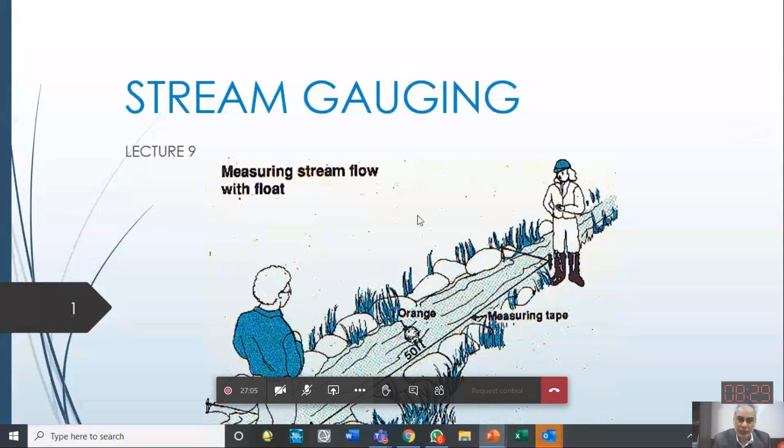So in this figure, in the title figure, you are seeing a very simple method of measuring, which can be used by you also. And who can describe this figure, what they are doing? क्या किया हुआ है? एक stream चल रही है. There is a stream. And there is an orange floating in the stream.

So in this case, we can use a staff, meter, or any stick which we can measure with. We can put that stick inside the water and see how much is the depth at one location. Then we put it at another place, and see how much is the depth along the cross section. Along the cross section, we put the stick or staff inside and check the depth at the next point, then the next, then the next.

In this way we can draw the cross section. This method, in which we physically go into the stream and measure the bed elevation or depth of water, we call the sounding method. We are sounding the bed of the stream using bamboo. If it is a 4 or 5 meter deep stream, we can use large bamboos.

We can sit in a boat and do it. And if it is a stream with small depth, we can go into the stream ourselves. That's why they have long waders worn, and they can go into the stream. This we call wading. This method of sounding the stream by going into it and measuring the depth of water, we call the wading method.

So keep in mind, the cross section you have to survey. And if it is a very deep channel, for example, even a large bamboo tree cannot reach the bed of the channel. Is there any example of such a channel which is very deep?

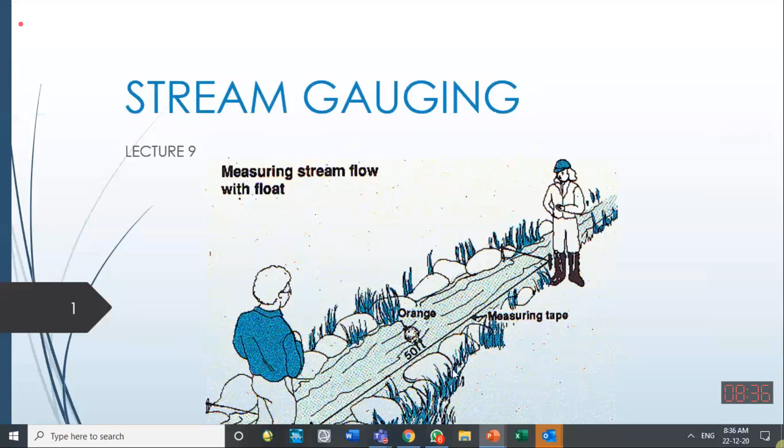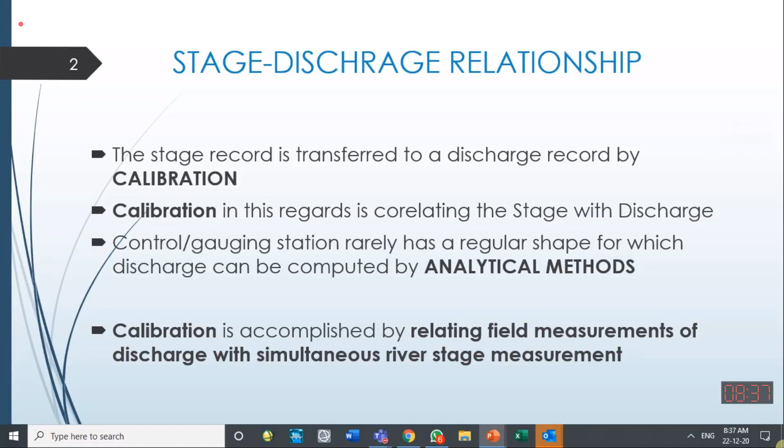As I have already described, usually we have a stage-discharge relationship, which is called a rating curve. Development of this stage-discharge relationship we can call calibration, or making the relationship between these two parameters. Later on we can use these rating curves for reporting the discharge by simply measuring the stage at the location. First we should have the rating curve with us, and then we can use that in the later stages, later time steps.

Before that, they have mentioned that the rating curve is used to estimate the discharge. And I have informed you that the rating curve is the relationship between stage and discharge itself. Usually stage is on the vertical axis because it is mentioning the depth, and the discharge is usually on the x-axis.

This is our norm over here. Although discharge is dependent upon the depth, so independent parameters should have been on the horizontal axis, but because we can see the depth variation vertically, it is normal practice that depth is mentioned on the vertical axis in the rating curve. So if the rating curve is available at a location, you can estimate the discharge using that rating curve by knowing the stage for any water level.

Another method is current meter. Current meter is a mechanical, rotating kind of instrument. When it is placed at a certain depth in the channel, it starts rotating with the speed of the water, causing revolutions or rotations of its cups or propeller, and the number of rotations per second can be related to the velocity.

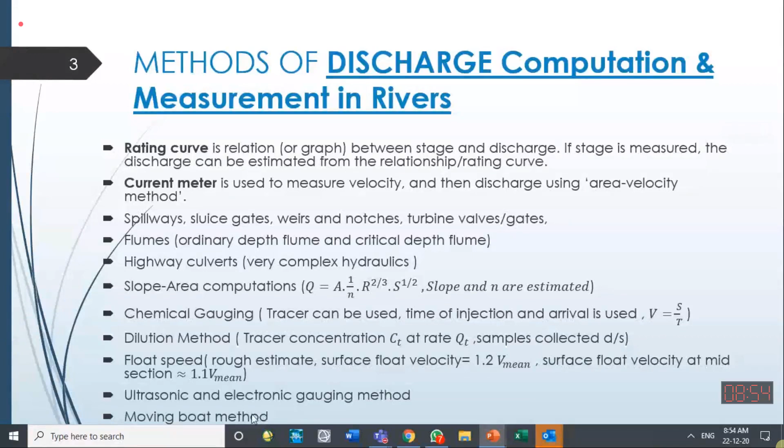Ultrasonic and electronic gaugings are quite frequently used nowadays - these are new methods. Sound waves or electromagnetic waves are used to estimate the depth of the channel and the velocity in the channel. In the moving boat method, these instruments can be placed on a boat, so this method is called the moving boat method.

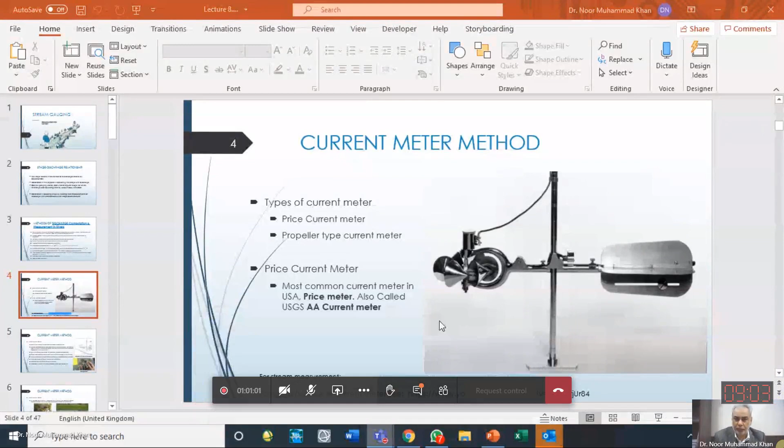The current meter is the most widely used method for estimation of velocity in the stream. Current meters can be of different kinds. Some current meters are provided with cups attached to a vertical axis - the axis of rotation is vertical, and they rotate in a horizontal plane. So if the axis is vertical, the cups will rotate in a horizontal plane.

Usually we have a weight installed to this current meter at the bottom, not shown in this slide, but it will be shown over here. In this slide, there is a fish weight, we call it. Its shape is like a fish. It keeps this whole instrument vertical. This weight is quite heavy, 30-pound weight, 40-pound weight, depending how big is the stream, how big is the flow velocity. This weight does change.

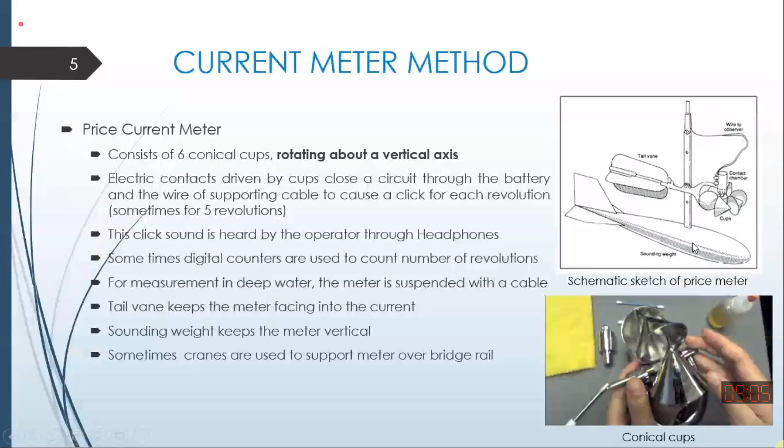So one will be the cup type of instrument, and the rotation of the cups. For each rotation, there will be a click generated, and those clicks will be noted with the help of some data logger or screen, or in the old instrument, usually we were provided with the

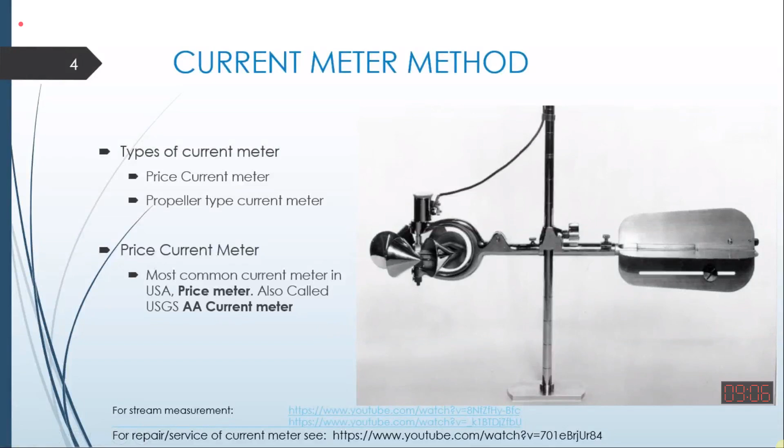Another kind of current meter is the propeller. In the Price or AA current meter, we use cups. In the propeller type, we have something like a propeller of a turbine or of a boat attached to it. Its shape will look like this one. So this is a propeller current meter. It rotates on a horizontal axis.

Its axis of rotation is horizontal, and it doesn't have cups installed. Rather, curved vanes are installed as a propeller. So when water passes along this, it starts rotating, and the rest of the method is the same. The number of ticks is measured, and we can estimate the velocity. So these are the two main kinds: one is a cup type current meter, another one is a propeller current meter.

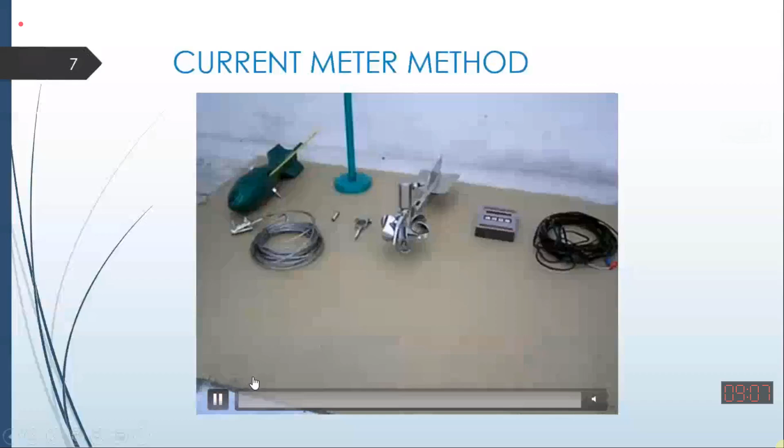So there are some videos available which you can see later on. So this is how its installation is carried out. You can see this video in the later part. And this is available in your slides also. Here is the actual measurement.

When water depth is small, you can go into the stream and measure the depth of the channel at different locations using this rod, and we call this a wading rod. This method of measurement of discharge or velocity we call wading. Wading, W-A-D-E, means walking through the channel. So they physically walk through the channel at different locations.

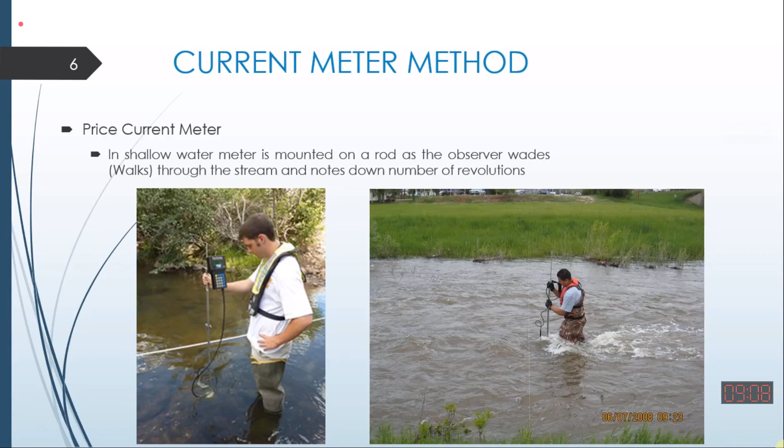They measure the depth, they measure the velocity, note it, then come to the office and carry out computation, and the total discharge in the channel is measured. Because velocity is different at different locations in the channel, they don't take only one reading. So it is recommended that the whole channel be divided into smaller segments like this one. They divide it into 10 to 20 smaller segments.

So velocity is measured in each of these segments independently, separately. They will go to the first segment, measure the total depth, then the current meter will be placed at the appropriate depth, because the velocity varies vertically. So the current meter should be placed at the appropriate depth.

It is found that the appropriate depth to estimate the velocity in a certain section should be 0.6 times of the total depth from the top of the water surface. That will be representing the mean velocity in that part. So we say this is the mean velocity at 60% of the total depth. So one method is that we place the current meter at 0.6 times of the total depth in the channel, and this method of measurement is called the 6/10 depth method.

So when the channel is not very deep, it has a shallow depth, then only 1 point can be used to estimate the velocity, and that 1 point should not be the middle of the channel. It should be a little bit lower than the middle, 0.6 times of the total depth at that place from the top of the surface. For example, at that place, channel depth is 1 meter. So mean velocity will be at 0.6 meter from the top of the surface, not from the bed.

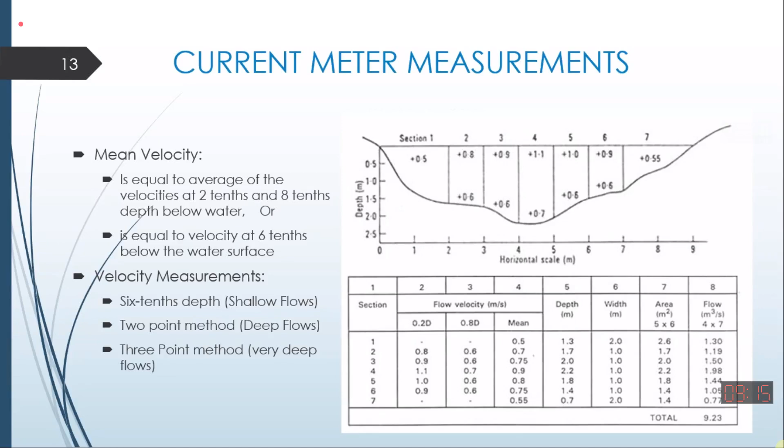So knowing the water stage of the channel at that time, that will give you one point between stage and discharge on the rating curve. So repeating it over several days, several months, you can develop the rating curve at a new location. If somebody has already developed it, then you are lucky. That's important, and there is a lot of labor behind it.

This is showing you the variation of the velocity at different depths and different width points. So it should be kept in mind that velocity is not constant. That is why we divide the channel section into smaller subsections. This is showing you the velocity distribution in the vertical plane. If you go along the depth, velocity in some places is small, then large. So velocity varies with respect to depth. This should be known to us.

This should be known to you, that velocity in an open channel is not constant at each location. It varies. So what is the mean velocity? People have estimated that the mean velocity at a certain width of the channel section is at 0.6 times the depth, or the mean of the velocities at 0.2 and 0.8 times the depth. So that should be known to us.

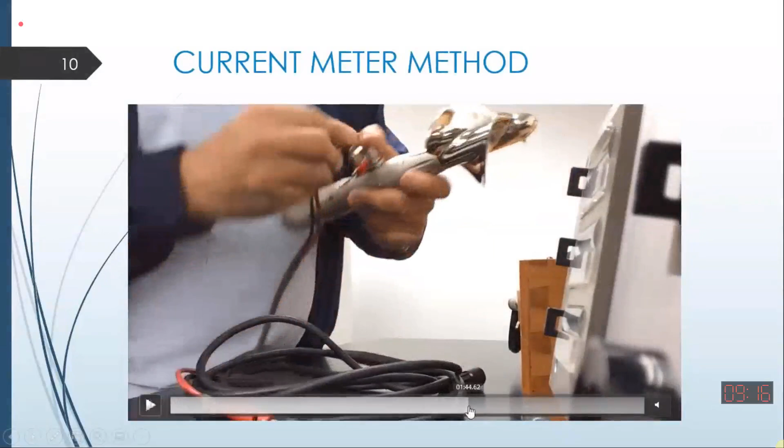He is checking it, opening it, checking it, and each rotation will give a pulse, and that pulse or signal is noted by this meter or counter. Instead of this counter, we can have a headphone installed and we can listen to the sound also.

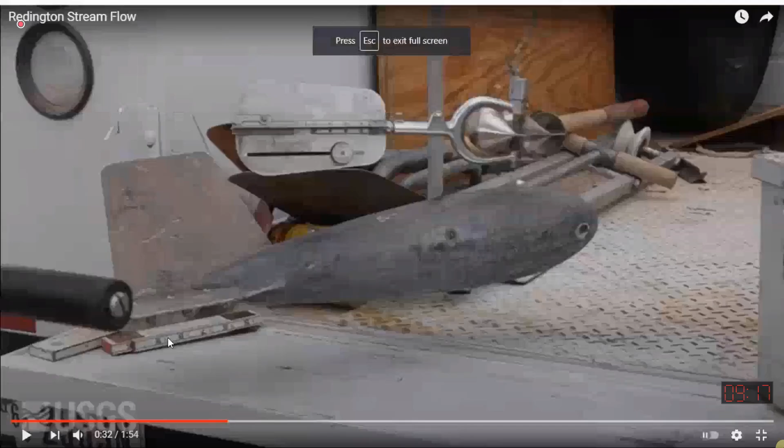Similarly, on this first slide, these two YouTube videos are there. They are actual measurements of discharge in a channel in the USA. If I show you just for a few minutes, here is a current meter in the laboratory, and they are using it, and the weight they are using is 100 pounds. And this is a trolley we sometimes use when we are working on a bridge. We need such a trolley.

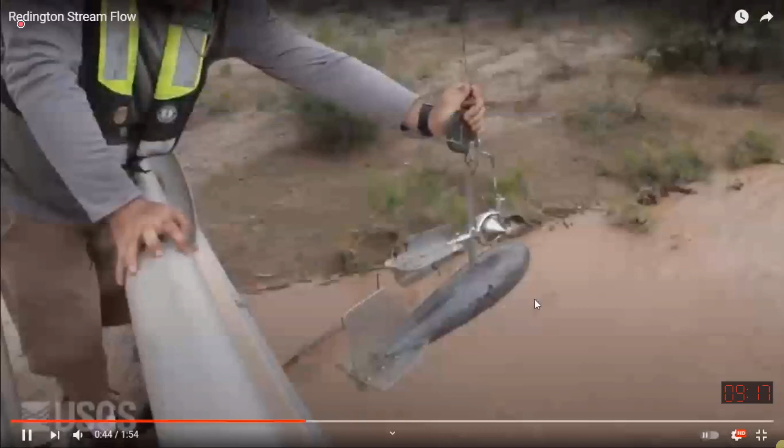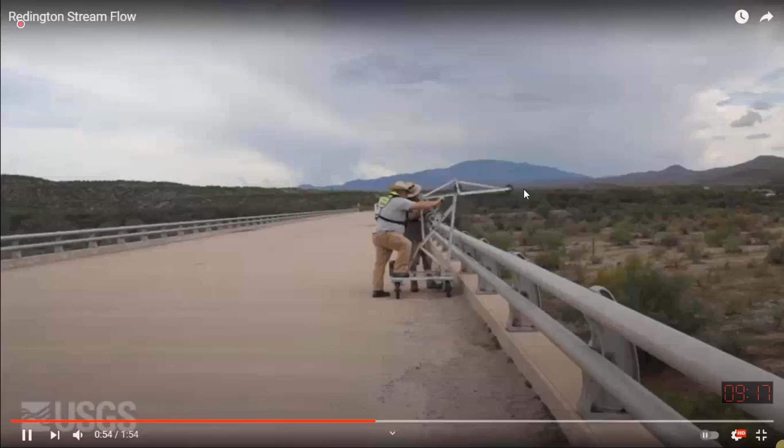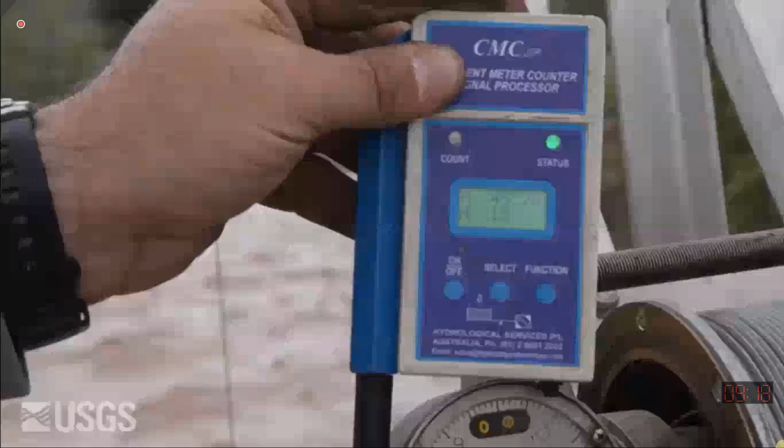A suspended current meter using the bridge crane or bridge trolley. They release it, and it goes into the channel itself. Here is a wire which is used to measure the stage. Now we cannot see the current meter, but because of the weight attached to it, it stays vertical.

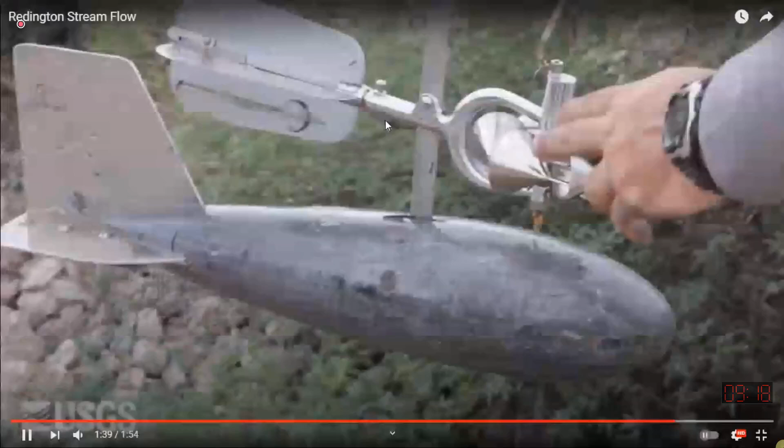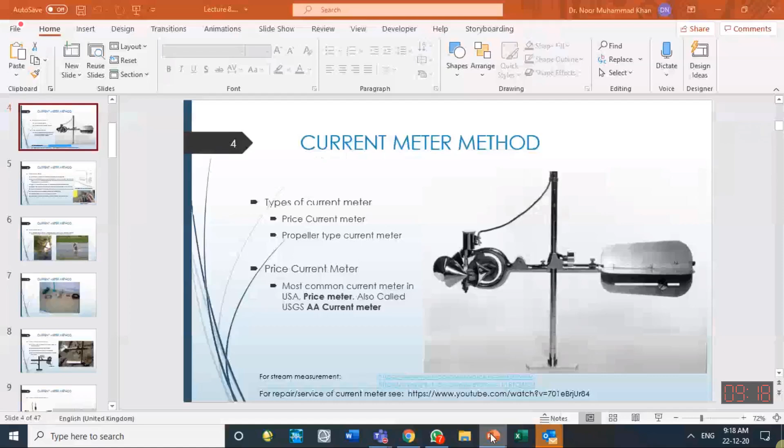So these are the current meters. Here is a rating table, the rating coefficients for this instrument. This instrument is available in our lab also, so I have taken this picture from the lab. They are telling that if the 40-revolution contact is being used, then use these coefficients, 38.5 and 0.0262.

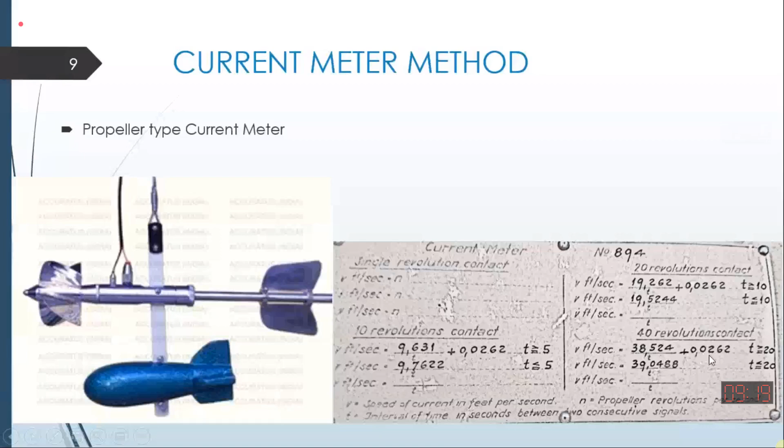And I have elaborated that the total discharge is estimated by measuring the discharge in the smaller subsections and then summing them together. Usually we divide it into 20 to 30 vertical sections. The criterion is that no subsection should have flow or discharge of more than 10%. If that is the criterion, it means we have to make at least 10 sections.

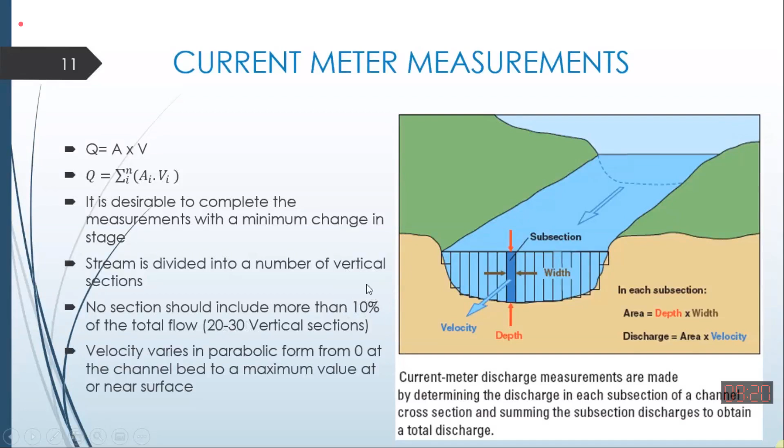But if you divide it into 10 parts, flow is usually much higher in the middle parts. So it is possible that in the middle part the flow is more than 10%. That's why 20 to 30 vertical sections should be made if we want to make sure that no subsection has flow of more than 10%. Got it?

So A and B will be given by the equipment manufacturer, the current meter manufacturer, or you will get it from the calibration of that current meter in the lab, in the flume. So either 0.2 times and 0.8 times of the depth are used to estimate the discharge, or 0.6 times of the depth. It should be kept vertical with the help of this weight.

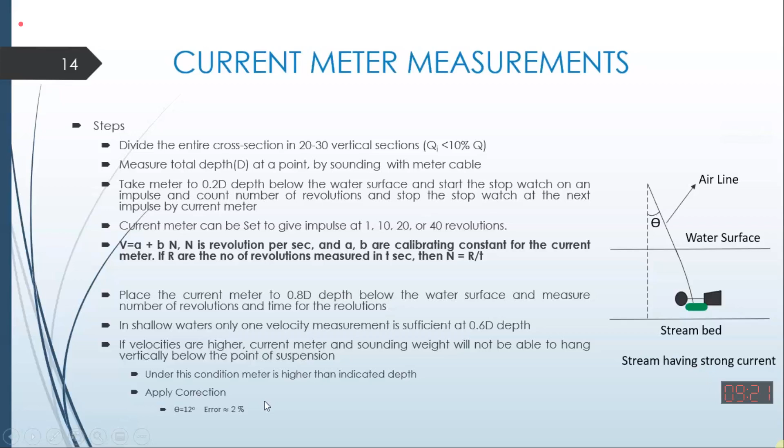If it is not vertical, then there are chances that error will occur, and the approximate error for 12 degrees out of plumb angle will be about 2% of the velocity. That will be wrong. So if you are using the 2 points method, take the average. If you are using the 1 point method, that will be the mean velocity.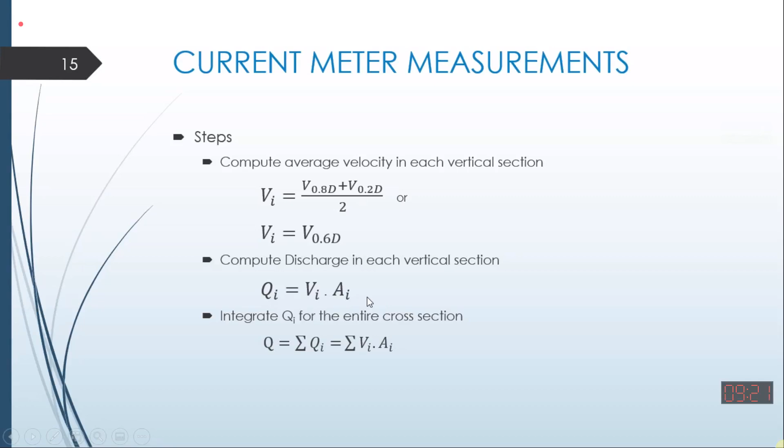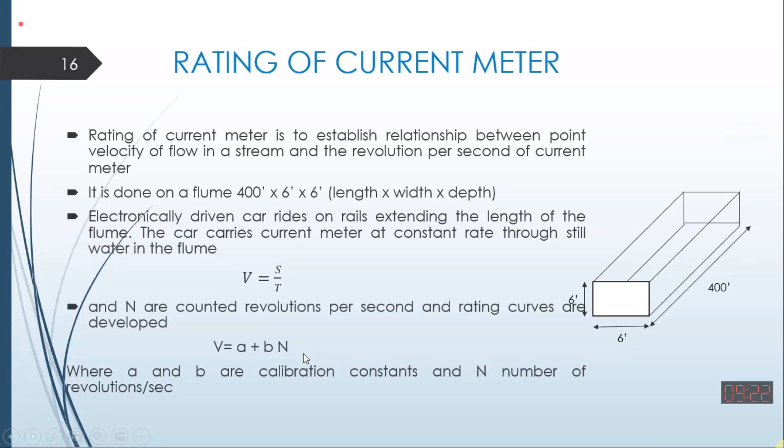Mean velocity into flow area of that subsection will give discharge in that subsection. Summation of all such discharges will give total discharge in the channel. If you divide this total discharge of the channel by the flow area, you will be getting the mean velocity. So it's a numerical question. These you have to solve yourself.

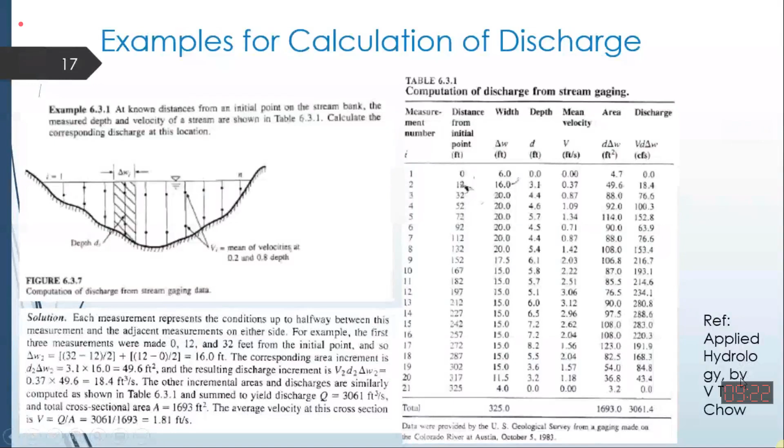Please go through this example, and a few lines have been solved and described over here. And I have taken this example from Applied Hydrology by Ven Te Chow. If this book is with you, you can see this example over there also. This example is solved in this part also, so I describe it over here.

Discharge is measured in a channel and it is divided into a number of subsections. The first reading is taken at a distance 0 from the bank, and depth over there was 0, meter was at the 0 depth, no revolutions were there. And then the second measurement was done at 2 feet from the bank, and the depth over there was 1 feet. Meter depth was 0.6 of this one. So 0.6 feet, so the 1 point method is used.

Number of revolutions were 10 revolutions in a time of 50 seconds. So 10 revolutions in 50 seconds, we have to convert it into number of revolutions per second. A for this current meter was 0.1, the coefficient 0.1. The second coefficient, multiplying coefficient, was 2.2. So such a table should be made before going to the field.

Such a table should be made: distance from the bank, depth at that place, and location of the current meter with respect to depth, whether it is 1 point or 2 points. So revolutions noted at that location and the time in which those revolutions have been noted. Then N should be calculated, number of revolutions per second, division of these two.

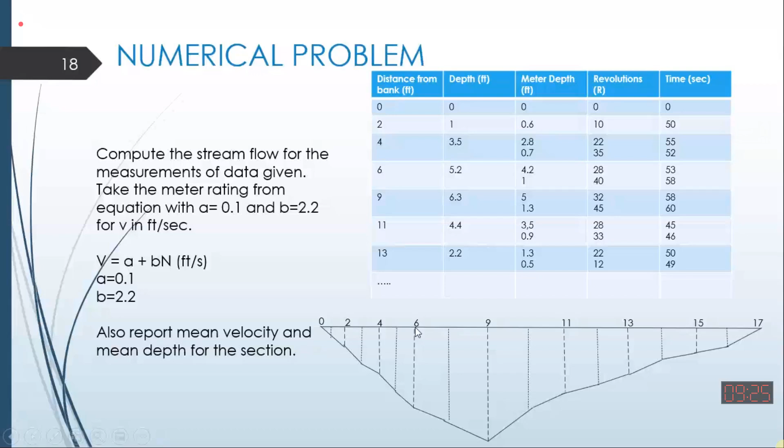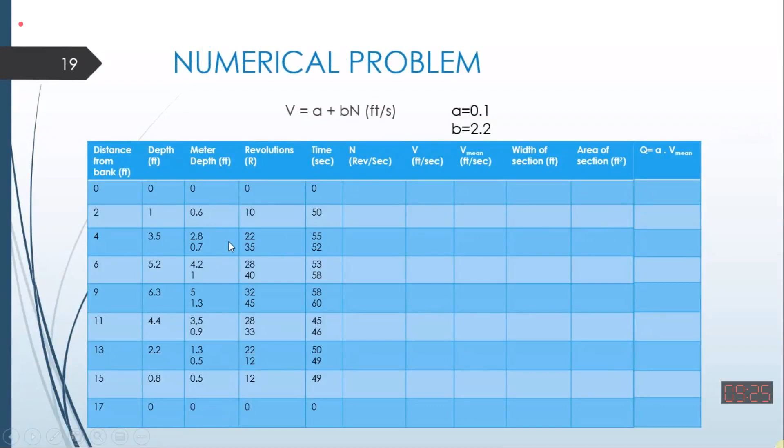So width of this section will be 2 feet. Depth is noted over there. So width for the second should be 2 feet. Depth should be whatever depth is measured over here, 1 feet. So area is 2 into 1. We can estimate. So this is solved over here.

So please try to do it yourself. Usually we put some similar questions in the exam also. If you don't have practice, you will not be able to do it. Sometimes we give you the mean velocity ourselves. Sometimes we give you the N value, and A and B values will be given. Then the mean velocity you have to estimate.

Sometimes we put the current meter at one depth only, 0.6 of the depth. Sometimes we put it at 2 depths. So the mean you have to find. So you should know how to calculate the width and the flow area and multiply it with the mean velocity, to get the total discharge in a subsection. Add them together, you get the total discharge. Divided by the total flow area, you get the mean velocity also, if you are interested in it.

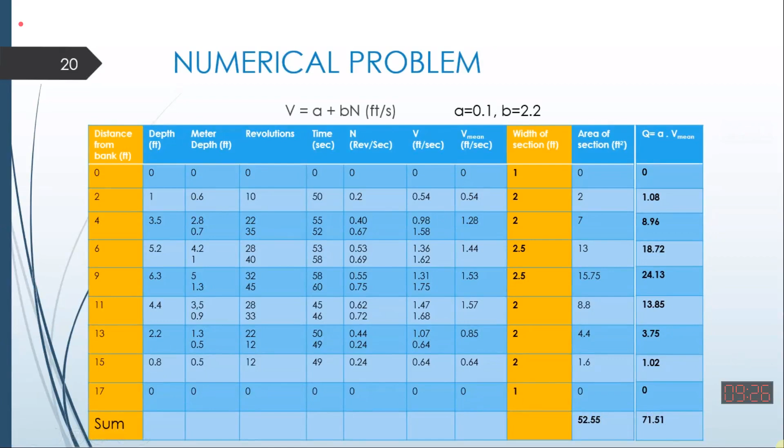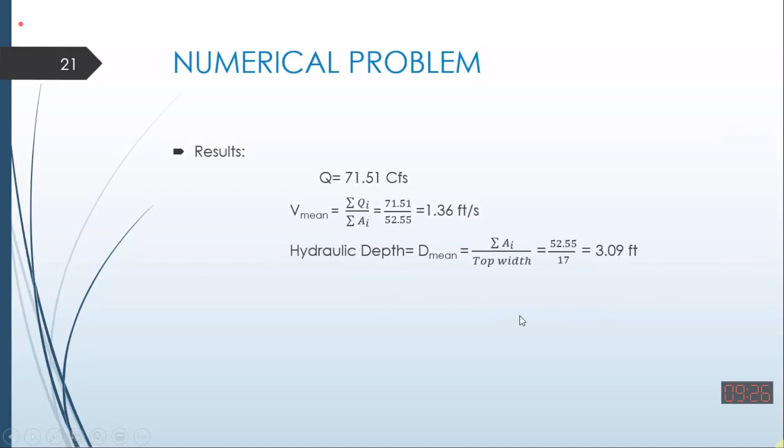So velocity at different sections is different, but the mean velocity will be something else. So please solve it. And also you can have the estimate of the mean hydraulic depth, which is the flow area divided by top width. So many parameters can be calculated using this. So that is the conclusion of the current meter method and its computation. Please solve the numericals so that you are familiar with such computation. And this is utilized in the field also.

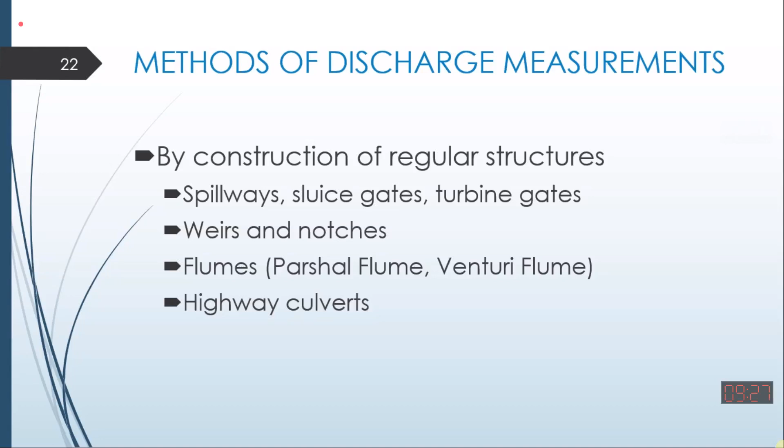Spillways, weirs, flumes, highway culverts can be used to measure the discharge. For all of these, we should have a relationship between discharge and head above the crest of those structures, head above the bottom of those cross sections. So if the spillway is there, head above the crest is related to the discharge, and we can get it. So that is the condition which is shown. There is a notch or weir attached over here. So a V notch is there. The head above this notch is measured, and using the discharge formula, we can have the idea of flow.

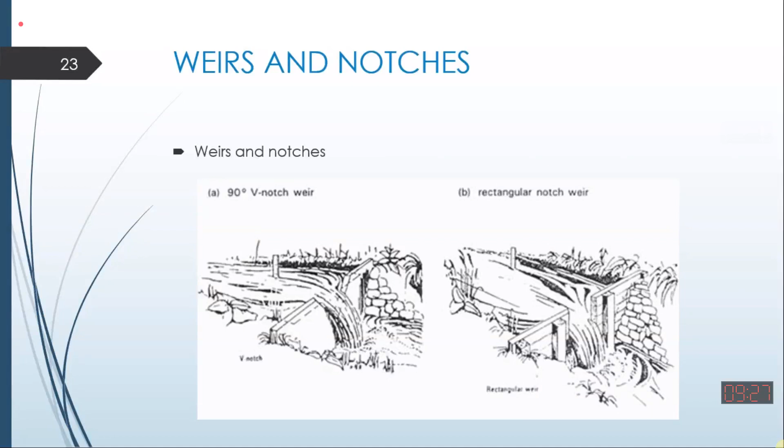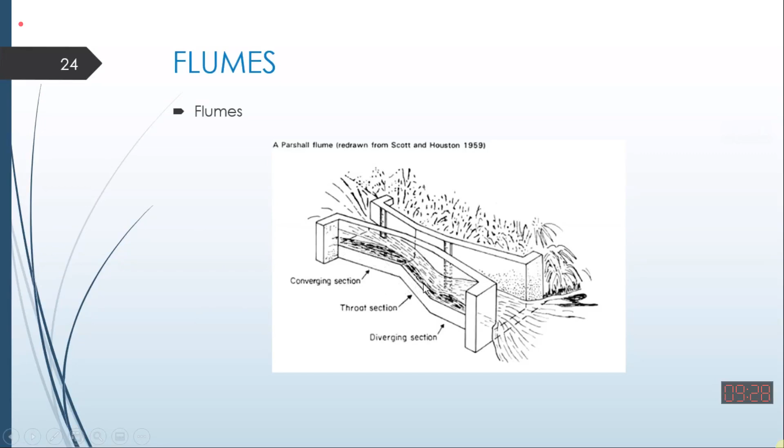So notches are placed in small channels. Weirs are placed in large channels. The difference between weir and notch, I think I told you last time also. Weirs are masonry structures, made of concrete or bricks. Notches are metallic structures made of steel plates. So notches can be rectangular or V notch. Flume I already described. We measure the depth at two sections, one at the throat, one at the upstream side. The difference of these two depths is related to the discharge passing through the flume.

The dilution method may be a little bit new for you. It was developed quite early, in 1863, in the 19th century. It is effective for flashy and turbulent hilly streams where it is difficult to use a current meter. When there is a flashy stream like the Kunhar River, and there is good turbulence of water which mixes the salt, the tracer, inside it quite easily, then we use such a method of dilution of some chemical inside it.

This method involves injection of a chemical or tracer into the flow. We mix some known quantity of some chemical or tracer. It can be a colored tracer. Its known quantity, known concentration, is mixed in the water at one location of the channel, and sufficiently far downstream, where mixing is done, we measure the concentration. So the time taken for a concentration of a certain value to reach the downstream station is related to the discharge with the help of equations in the coming slides. I will show you how to relate the measurement of concentration with the discharge.

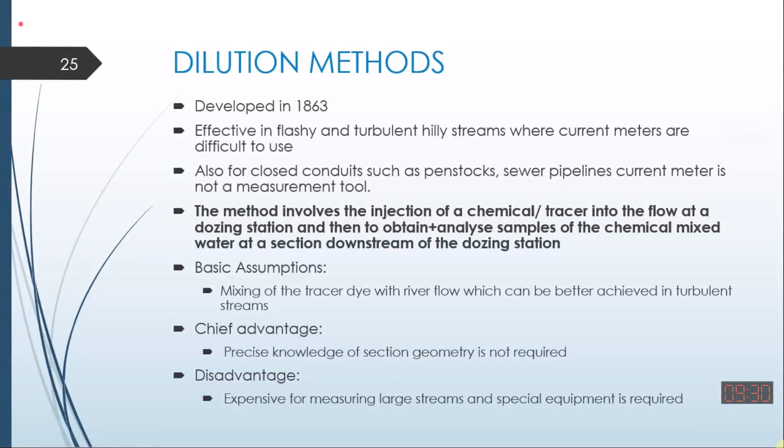So it gives us precise knowledge of the discharge there. Geometry knowledge is not much required here because we are measuring the concentration, and concentration can help us relate it to the discharge. Here is the scheme: if you are using this method, such a scheme you have to develop on the channel.

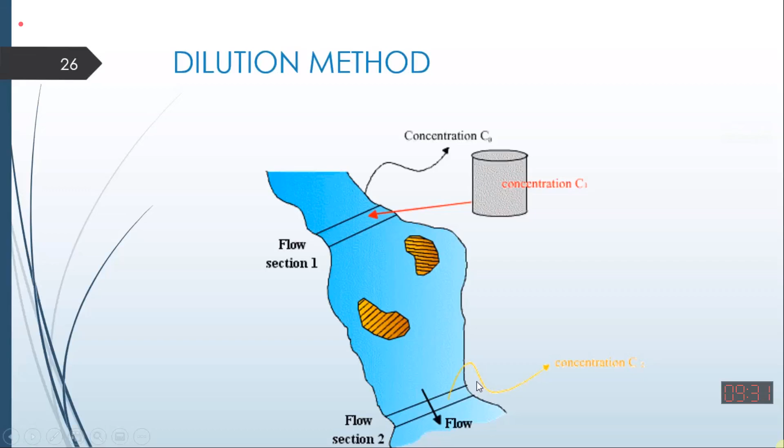You should establish two stations, one upstream and one downstream. At the upstream station, you will be adding a chemical or tracer. At the downstream station, you will be measuring by taking samples and doing lab experiments. Analysis of those samples will be carried out to know the concentration at the downstream station. Here they are mixing a color dye at one location, and at the downstream station, they are measuring it.

The reach should have no loss or gain of flow within the two measuring stations. Between the two stations, there should not be any linkage with another stream. That is an important factor.

Mixing must be complete, so there should be good turbulence in the stream. Wide channels and reaches with bifurcation should be avoided. These are some of the precautions you have to take while using this dilution method.

A reach where turbulence is high should be preferred. Bends, narrows, and waterfalls are good aids for mixing, as they help mix the tracer well. Pools of dead or standing water should be avoided.

The mixture or tracer used can be of different kinds. Sometimes simple salts are used because it is easy to measure the salt and it is not very costly. Different kinds of salts can be used as a tracer. Radioactive tracers can also be used.

There are some materials which radiate energy, such as gamma rays, and these are added to the stream. At the downstream station, using gamma ray cameras or other cameras, their radioactivity is measured, and from this they estimate how much radioactive material has reached there. Its quantity should be used in such a way that it is not hazardous to the habitat and living environment in the water.

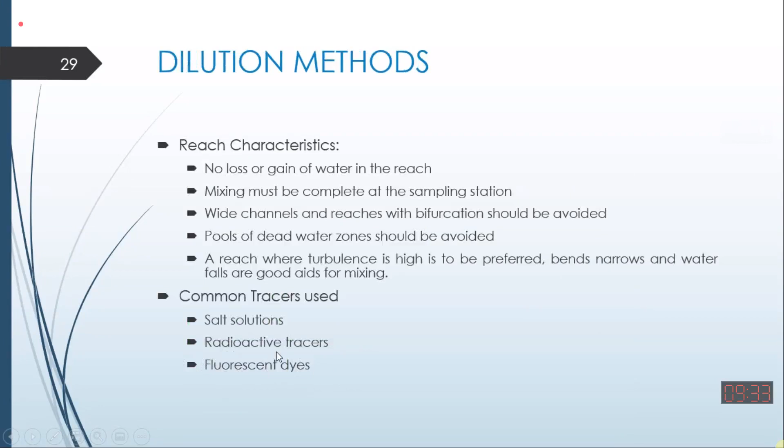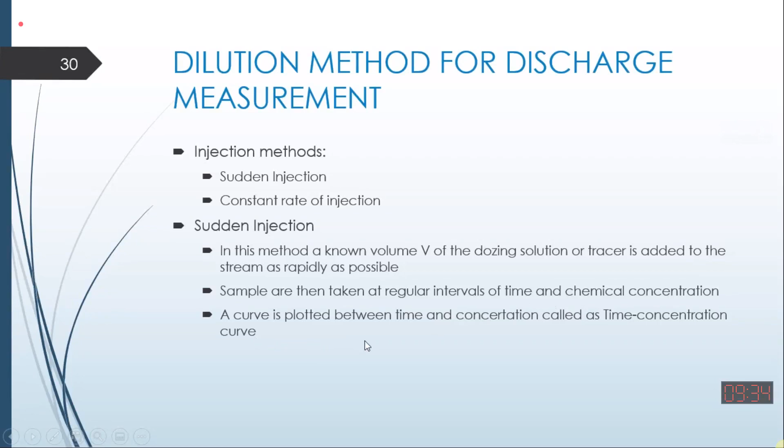In the sudden injection method, a known volume V is added suddenly at one section, and this tracer is added to the stream as rapidly as possible. Then samples are taken for this chemical at the downstream section, and a curve is plotted between the concentration measured at the downstream station and time.

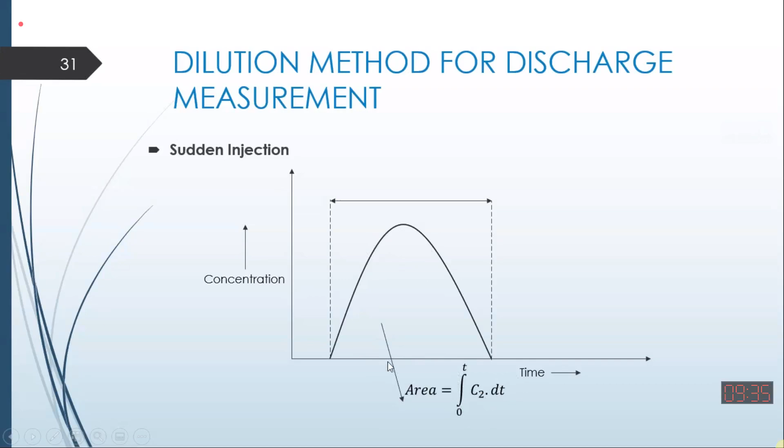The area under the curve gives you concentration multiplied by time, meaning the volume of the salt can be estimated at the downstream station. C2 times dt is the volume of that salt reaching at that point. Between two time steps, if we integrate it, we can find how much salt has reached there.

Here is the derivation of the relationship between the concentration measured at the downstream station, C2, and the concentration added at the upstream station, C0, with the discharge. The assumption here is that whatever concentration C0 is added at the upstream station, minus the initial concentration at that place, multiplied by the volume of the injected dosing solution.

For example, if we add 1 liter of this solution with the salt inside it, that concentration times volume should be equal to discharge times the area under the curve as we noted. This integration of concentration into dt gives the concentration at the downstream station collected over a certain time step dt.

So when we multiply this concentration with the discharge passing over there, that will give me the total volume of the salt passing over there. So if it reaches to the original value again, both left hand side and right hand side should be equal to each other. So volume of the solution added multiplied by its concentration should be equal to Q times dt. This is the volume passing through that location. Q times dt is the water volume passing through that, multiplied by the concentration. So both of these should be equal.

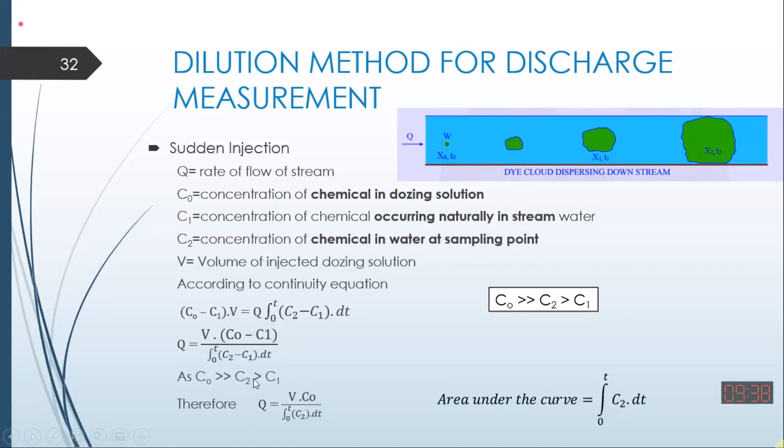So that helps us find the discharge in the channel. Similarly, an equation can be derived if we continuously add a tracer in the channel with a rate of injection of small q. In the previous example, the tracer was added immediately, a certain volume of the tracer V was added immediately.

Now, if we add the tracer through a constant rate of injection of small q, and the concentration in that solution is C naught, and the original concentration in the channel is C1, and the flow passing in this channel is Q, then the sum of these two will be equal to the sum of these two solutions: stream channel flow plus the injection flow, into the concentration measured at the downstream station C2. So this can be related with each other. So discharge Q can be expressed as C naught minus C2, over C2 minus C1, into small q.

So this is a known value. We have added it. C1 is the original concentration in the channel before adding. C2 is the concentration measured at a certain time step after some time. So if the rate of injection is constant, this C2 will also be constant after some time at the downstream location. So that can help us relate the discharge in the channel.

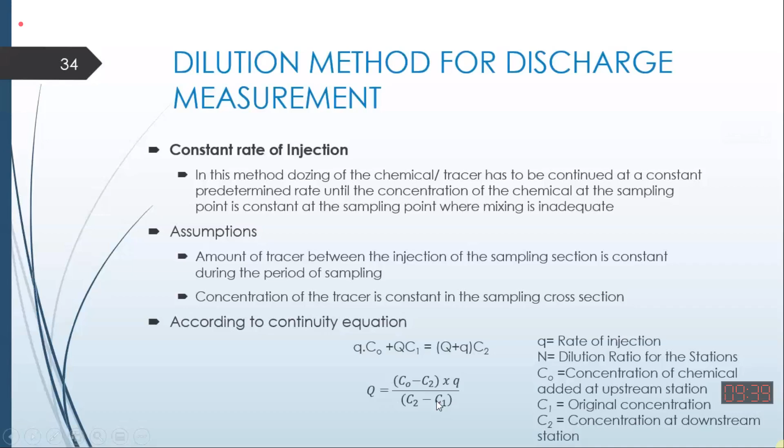Sometimes, again knowing that C naught is much greater than C2, C2 and C1 can be put equal to 0. And this equation can be simplified as Q is equal to C naught times small q, over C2. If we use the solution which we have added with the dilution ratio of N, and have a concentration of C3, then this initial concentration C naught can be replaced with N times C3. So either you use this equation if you have the initial concentration known to you, or you use the rate of dilution and C3, and we can find the discharge in this way using the chemical tracer method.

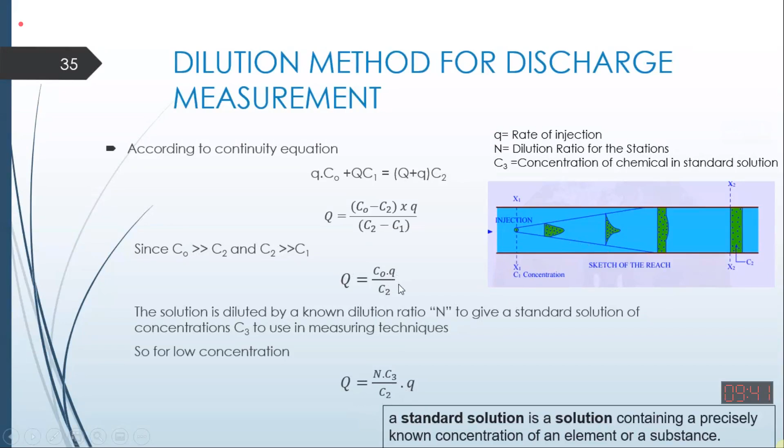So this concentration we measure by chemical analysis of the sample taken from the channel. We add the dose at the upstream station. We measure the concentration, which we call C2, at the downstream station where mixing has already occurred. So C2 and C naught can help us find the relationship between discharge and the initial rate of injection: C naught over C2 is equal to Q. So this can be used frequently for measurement of discharge in the channel.

We call it the tracer method. The ultrasonic method uses sound waves. A pulse is generated, and the time taken by the pulse from one edge of the channel to the other edge of the channel is noted, and that helps us relate the discharge with the time taken by the pulse of the sound wave. It is described in a good way in this video.

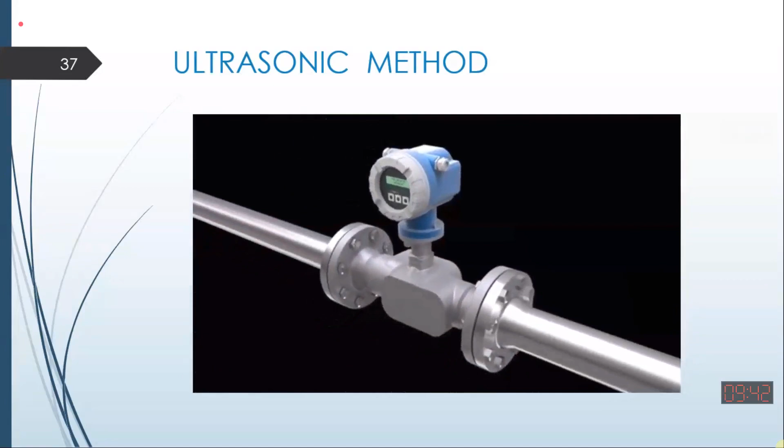These are the sensors attached at the side of the channel. A sound wave is created, and then the sound is...

So when there is no flow, the time taken by the signal going from one side to the other, and then from the other side to the first side, will be the same. But if the flow is occurring, then the travel time will be smaller in the direction of the flow.

Travel time of the sound wave will be smaller in the direction of the flow, and it will be larger in the opposite direction of the flow. So this difference is...

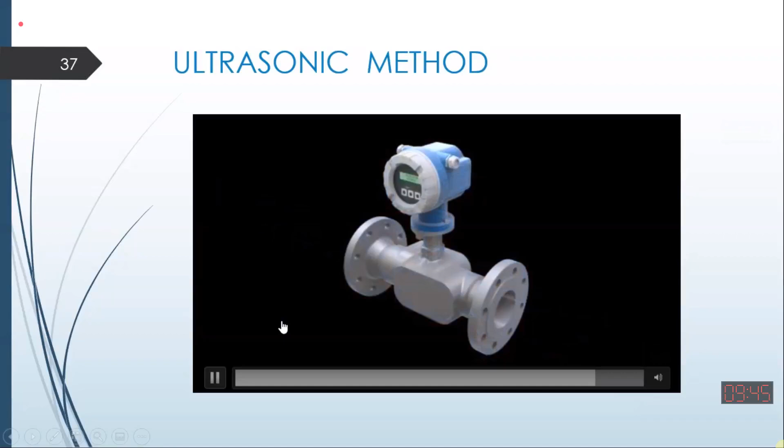That is how the ultrasonic method works in pipes, and the concept is similar in channels. Since we don't have a pipe in an open channel, these transducers or sensors are installed on the bank of the channel, and the speed of the sound wave, or the time taken by the sound wave to pass through the water body, is related to the discharge by a formula, so discharge is estimated through this channel.

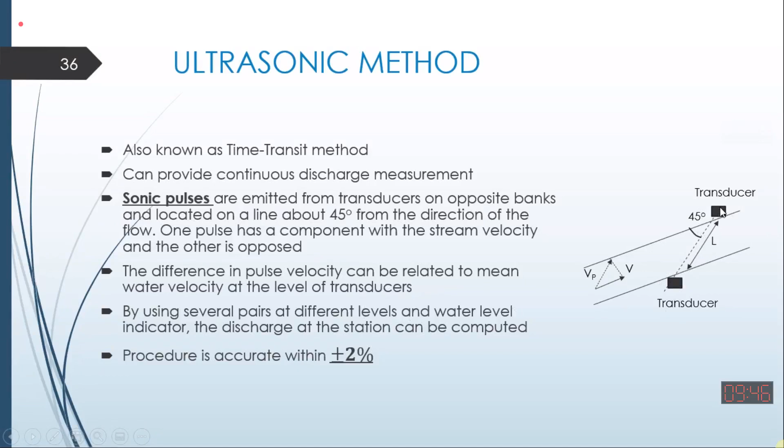Here is a brief description of how the measured time can be related. Time taken in the direction of the flow, if it is T1 and the length is L, then 1/T1 will be C plus Vp, the pulse velocity of the channel. Similarly, in the opposite direction, it will be C minus Vp over L, so its reciprocal is 1/T2 equals C minus Vp over L.

When we subtract them together, it can be written as 2Vp over L, since C is cancelled with C. C is the velocity of the sound waves, and the velocity of the water in the direction of the pulse is set as Vp. So Vp is the velocity of the water in the direction of the pulse, while C is the velocity of the sound wave itself, and V is the velocity of the water which we want to measure.

Vp is in the direction of the pulse, the water velocity in the direction of the pulse. It will be a little different from the velocity in the flow direction, so they are related with the help of this angle theta. So we can say that Vp is V cos theta.

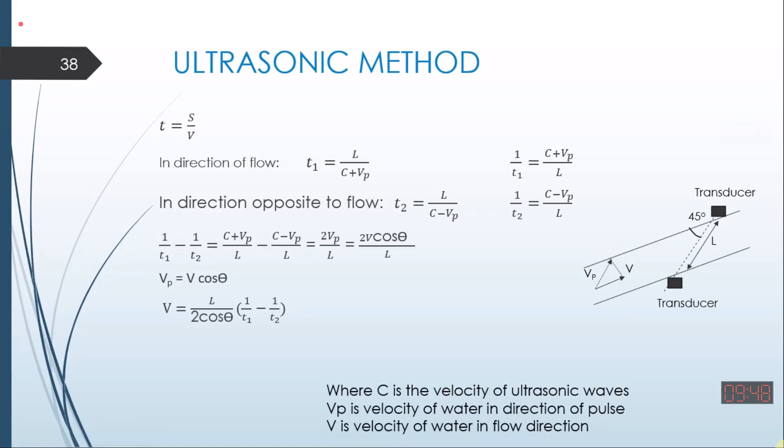It is an electronic instrument which helps us measure the time, called a piezo sensor, electro piezo sensor. When the sound wave hits the piezo sensor, it generates a voltage in that electronic instrument, and that can be used to measure the time taken by that sound pulse. Something similar can be done here.

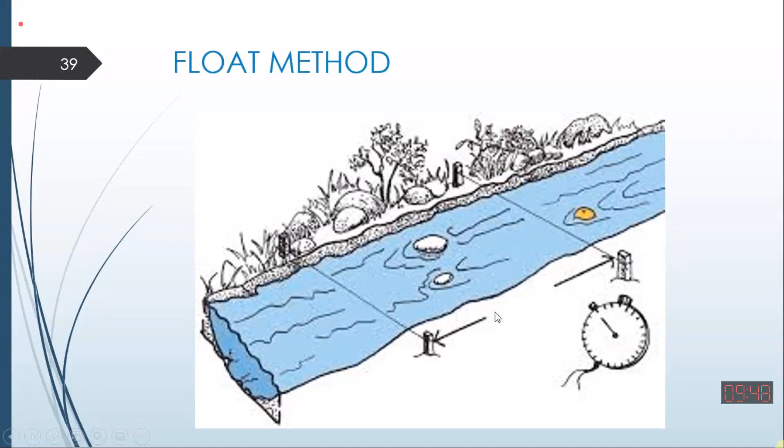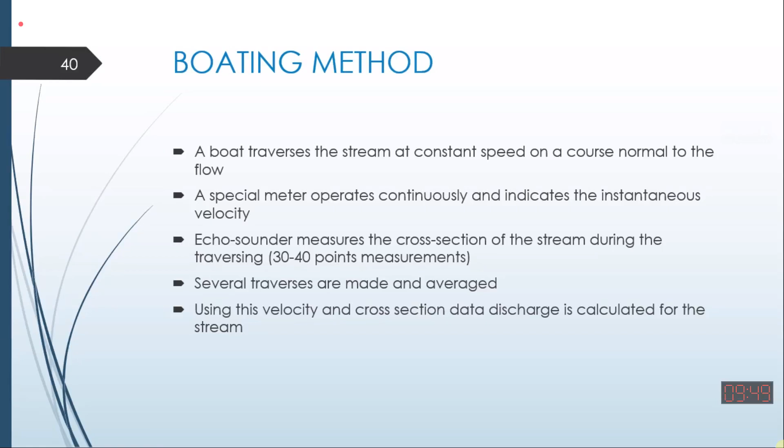This is the float method shown here, already familiar to us. In the boating method, the echo sounder and velocity measurement instruments are installed on the boat, and the boat is traversed across the channel cross section. The echo depth sounder gives the total depth, and the sound method helps find the velocity of the channel, so both together help with measurement of discharges.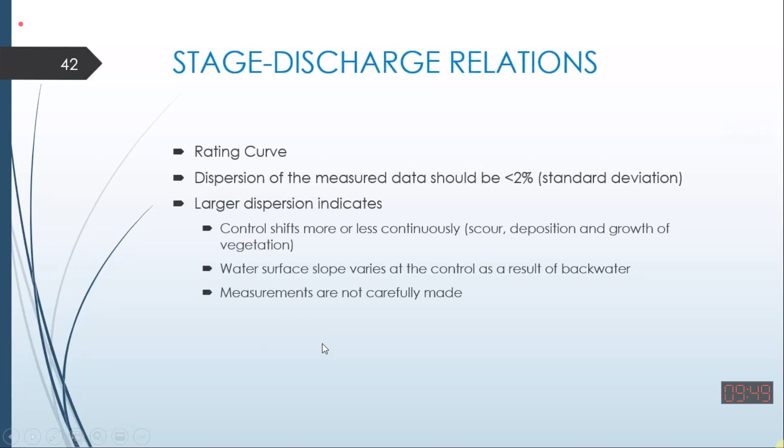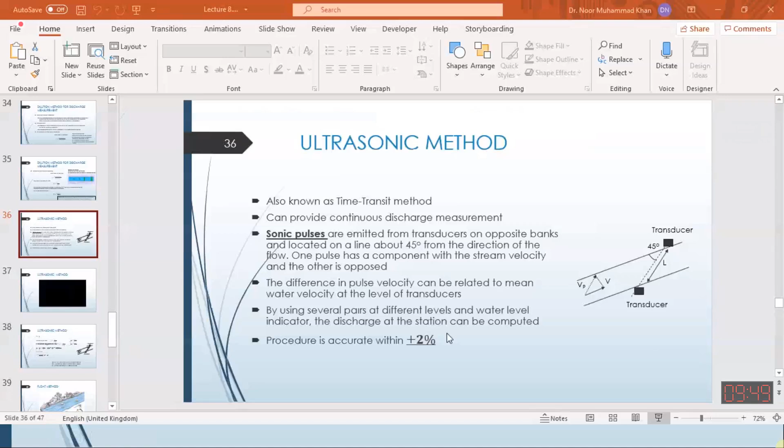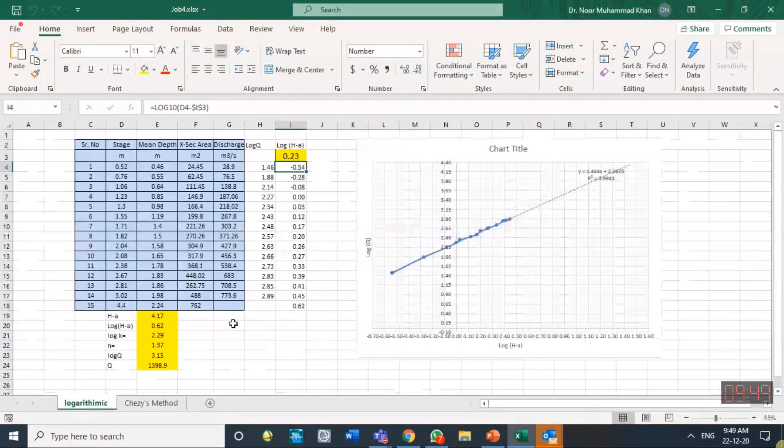The stage discharge relationship, as I already told you, is a rating curve, and sometimes we have to extend the rating curve. The rating curve is usually of this shape, let me show you the rating curve shapes. Here is the rating curve shown.

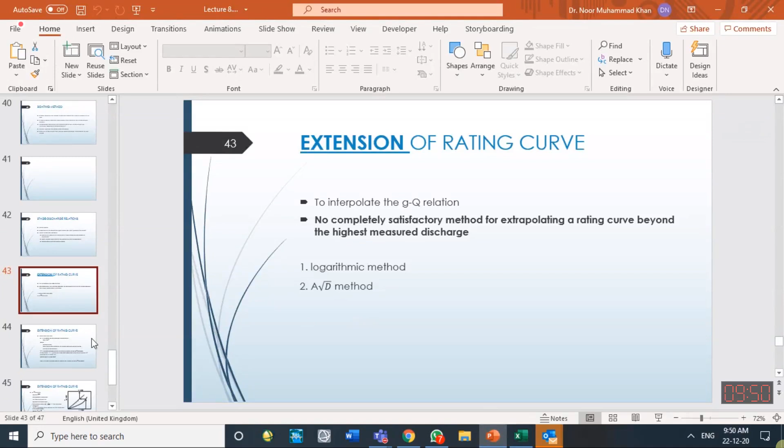Usually the rating curve is not a linear line. Going back to my slides, the rating curve is not a linear line between Q and H; usually there is an exponential function. The rating curve is a relationship between stage H and Q, and usually there is an exponential function, a function related with another parameter with the help of some exponent.

So extension of the rating curve is a special problem in hydrology. Frequently, a hydrologist has to extend the rating curve beyond its actual measurements. I repeat: you have measured a discharge and a stage, and developed a rating curve from several measurements, 20 or 30 measurements. But that has a limit based on whatever discharge in the channel you measured. Sometimes you want to know the stage for a higher discharge which you have not measured.

And this frequently occurs when you are designing a bridge, when you are designing a barrage, when you are designing a dam or spillway. You design it for an exceptionally high flow. We call it probable maximum flood. We call it 100-year return period flood. We call it 1,000-year return period flood. So we have to design the structure which should be safe for higher discharges than what we have measured there.

So when a discharge we have not measured over there, how can we know its stage? How can we know its water depth? So this is a problem where extension of the rating curve we have to do. You have a rating curve, for example, developed for discharge up to 200,000 cusec, 2 lakh cusec ke liye, you have the rating curve. But you want to design a structure over there which is safe for 5 lakh cusec discharge. So whether you will extend it linearly, whether you will be extending it proportionally, how to do it? So that is a problem which we call extension of the rating curve.

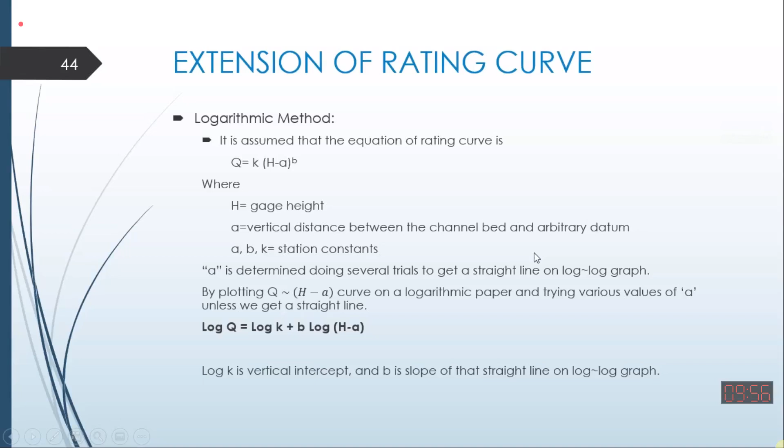as the correct value of A. Then the intercept on the graph will be log K, and the slope of that line will be B. So log K can be used to estimate the K value, B is the slope, and A also we have estimated. In this way, all these parameters A, B, and K are estimated. Once we have A, B, and K, we can find discharge for any higher value of H. So this method you have to apply in the lab also. So hopefully you have applied it. So if you have any questions, you can ask me.

Second method is extension using the A root D method. Have you done it in the lab or not? Anybody?

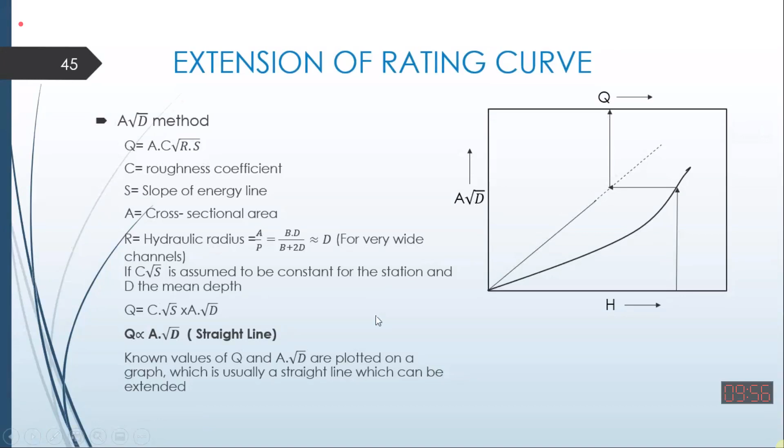So if you have any question, please ask me. In this, we assume that the Chezy equation is applicable. And if we plot the discharge with A into under root D, it should be a straight line. So that straight line is then extended to estimate the discharge value. So that is the second method.